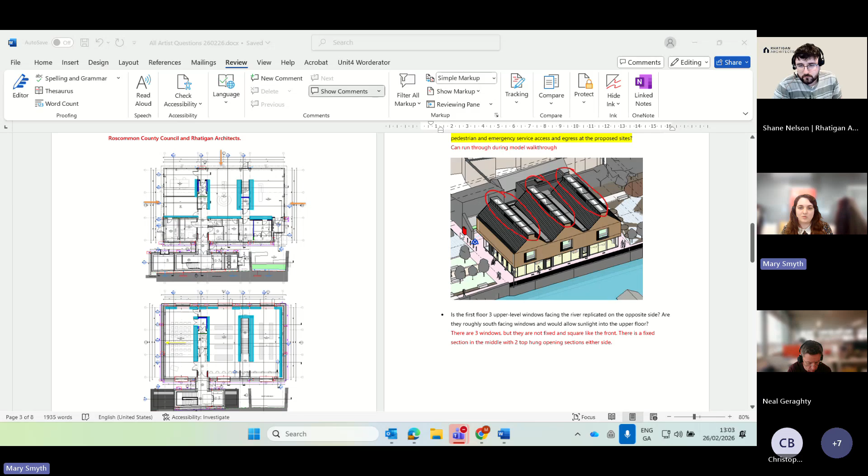So if there's any pedestrian emergency service access and egress at the proposed site, and we're also looking to get a better idea of the entrance way and the interior, and maybe some dimensions about walls and ceiling heights.

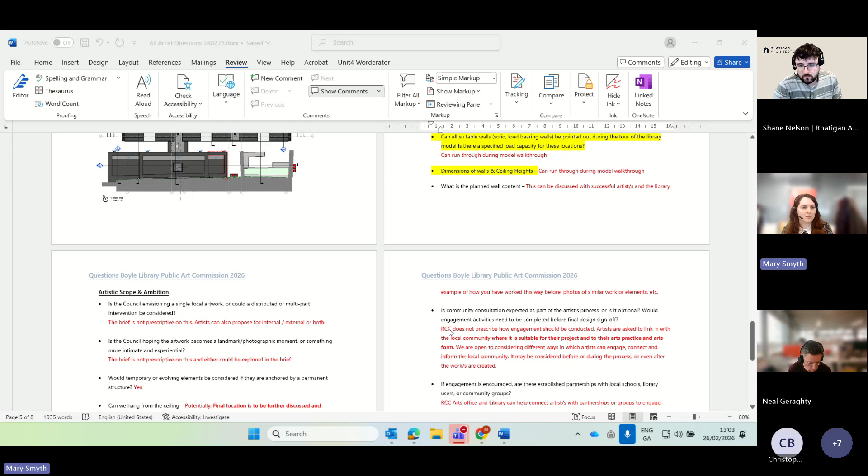And there were ones about, can we hang from the ceiling? We've said potentially, but that kind of final location is to be further discussed. So if that's all right with you, Shane, then those kind of bits can be highlighted for people.

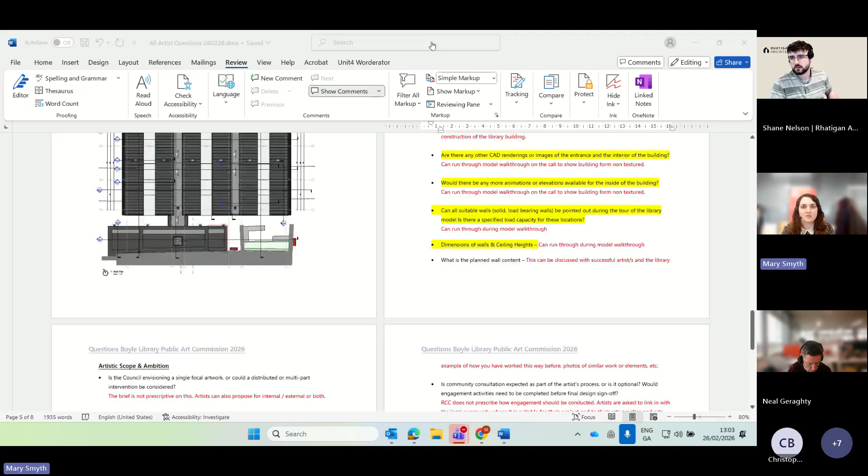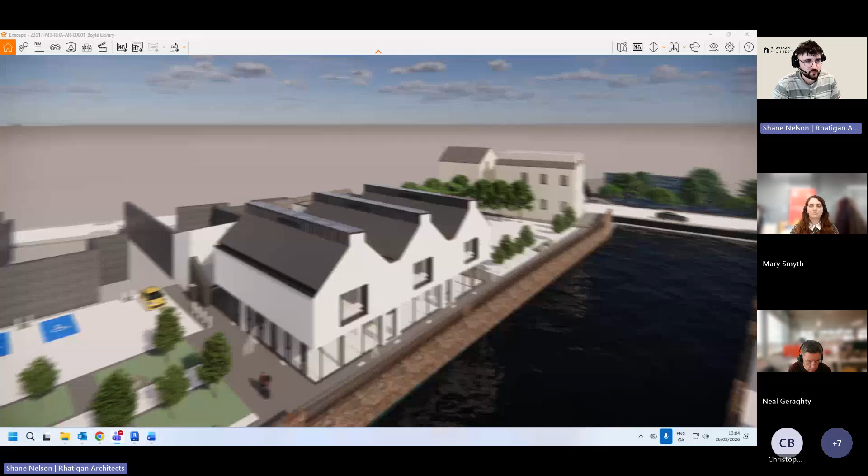Yeah, that's fine. So look, I'll do a run through the model here now, just to be aware it won't give you a sense of materiality because there's no textures applied to anything. So it'll just give you a sense of the form of the building itself.

So we have our three main A-frame pitch roofs. On the roof we have our roof lights from front to back on all three bays, so that sheds light into our three main open plan areas on the top floor. And then on the ground floor, we have our wrapped around curtain wall, and that wraps around the three main bays on the ground floor as well.

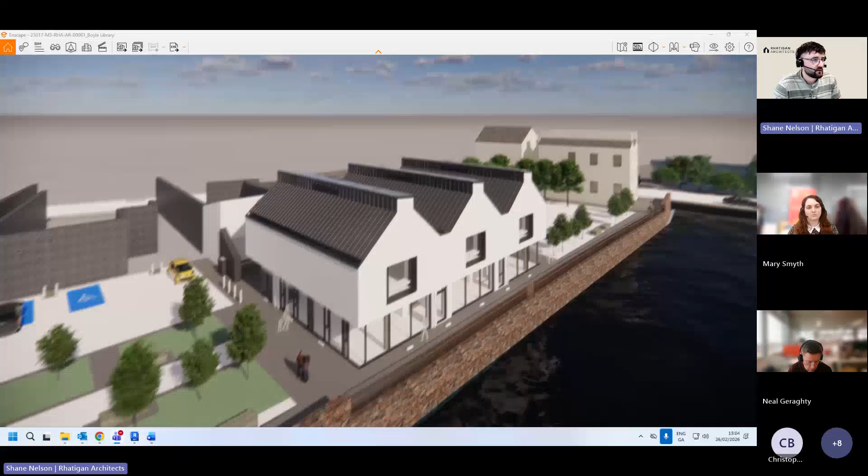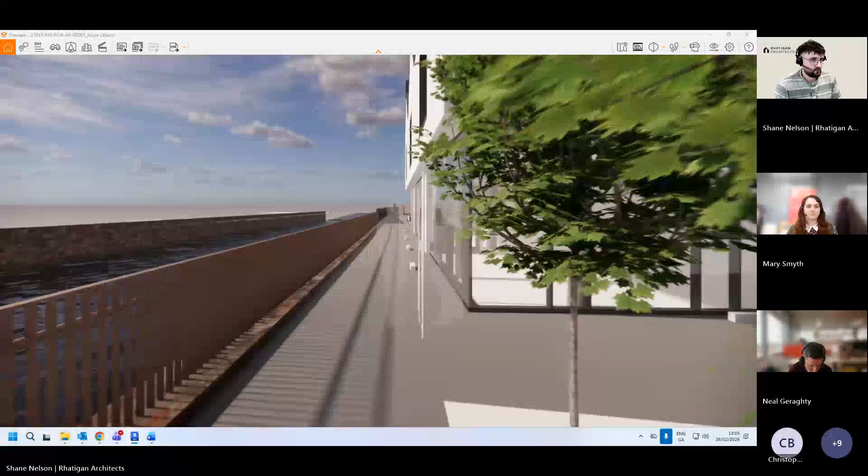So I'll just do a walkthrough if it lets me, one second. It's a bit clunky, this thing. So I'll just move around here.

So we have our courtyard area here to the left, and as we move into the entrance here, we wrap around and we have a sensory garden in this area here, and our main entrance is to the rear here.

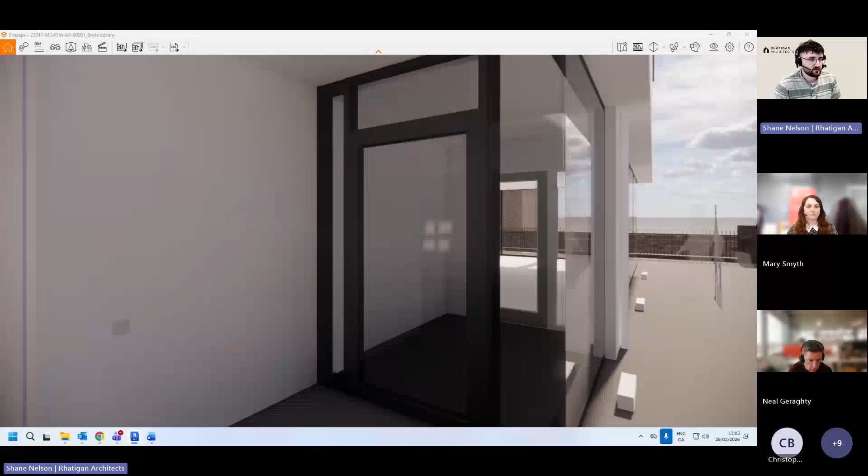So as we move in, we have our leisure reading area and main reception desk. This is our first bay, and then as we move through to the front here, we can move into our children's library area.

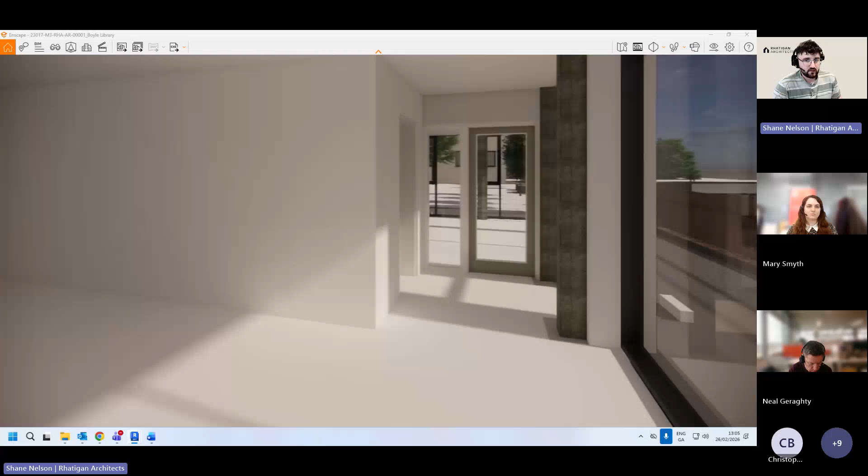So there'll be like a central desk in here for a seating area for sitting and all that sort of thing, and we have these two blocked areas here.

Now, there's no textures applied now because they were drawn in 2D, but our main bookshelves will be either side of the bay on all bays.

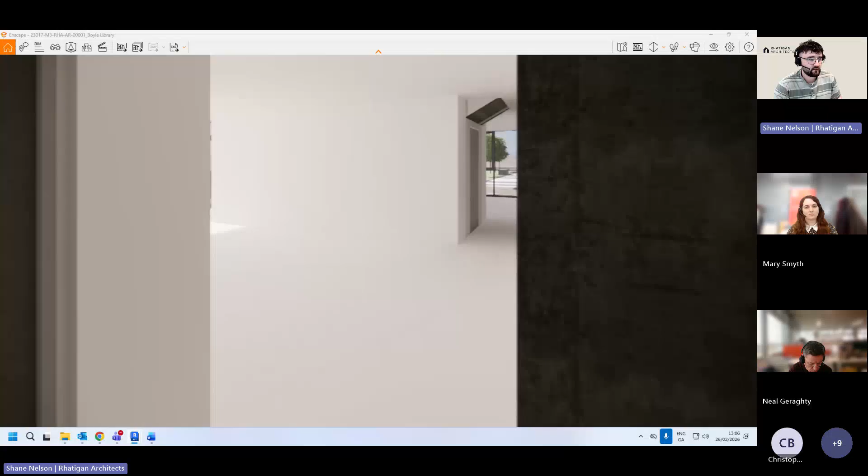So when we move into this area, we have a meeting room in here. We move back here, we have a staff room in here, and to the rear then we just have a vertical circulation area with light slices in each side, and we have our lift to the rear and a kind of back of house staircase then.

So I just move back to the front reception area.

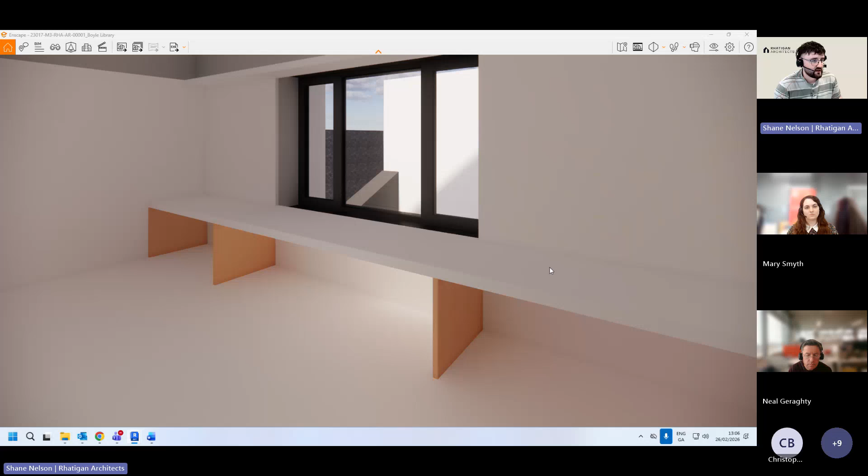So we have a main stair to the front that brings you up to the three main bays on the second floor. We have a tea station here, and desks and benches to the front and to the back.

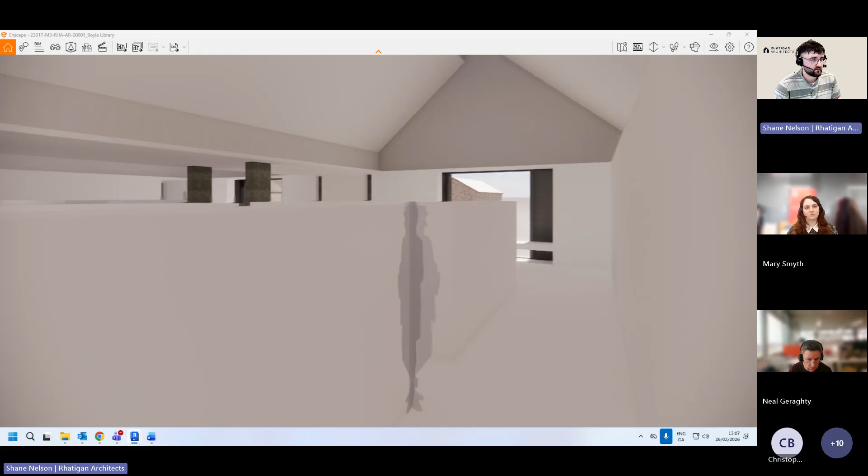If I pull back here, it gives you a sense of how the roof lights run front to back, throwing light down into this area. To the sides, these will all be bespoke joinery pieces for shelving and bookcases. In the center we do as well, but the textures don't really show it, though it gives a sense of what we're looking to achieve.

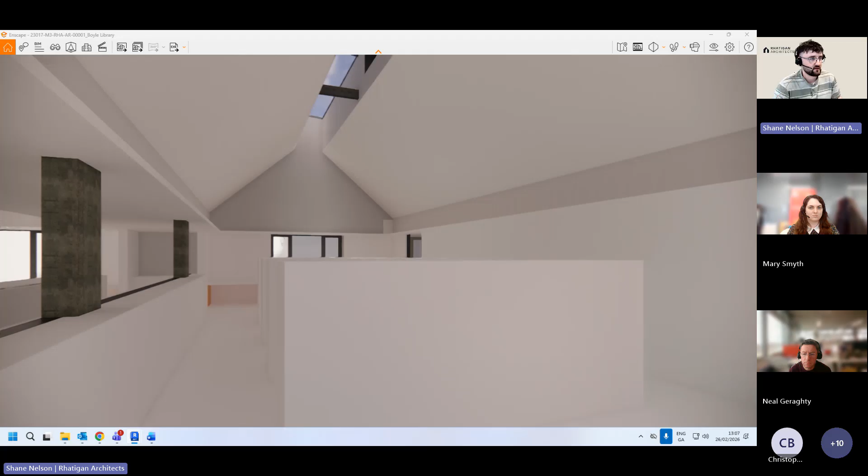So this is the first bay, and this is the teenage library area. If I move over, this brings us into the adult lending area, and we have the same concept where we have bookshelves on the sides built into the wall, and four main bookshelves in the middle as well, throwing in the light the same way.

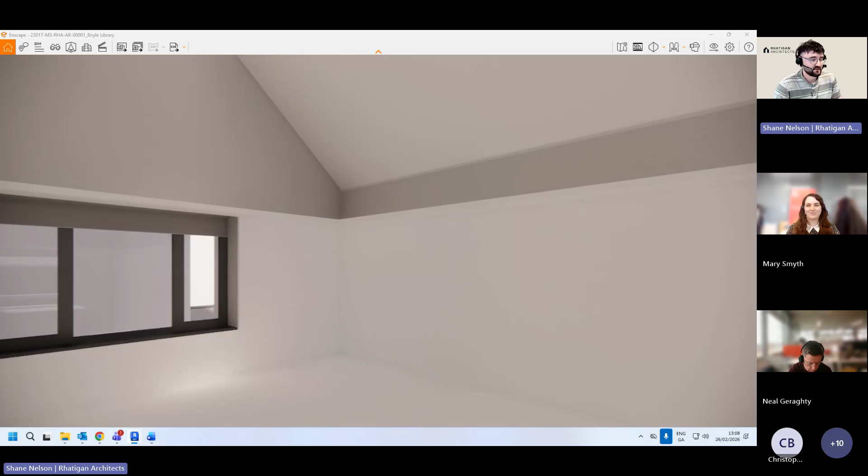And then our third bay is the event space and meeting area. This is the main area where we don't have shelving to the front and back, so it's more of a blank canvas where we could potentially do something artistic, some canvassing on this wall here. I've included that in the document as a potential area. And on this side, we do have some bookshelving on this end, so that should give a sense of what we're looking to achieve.

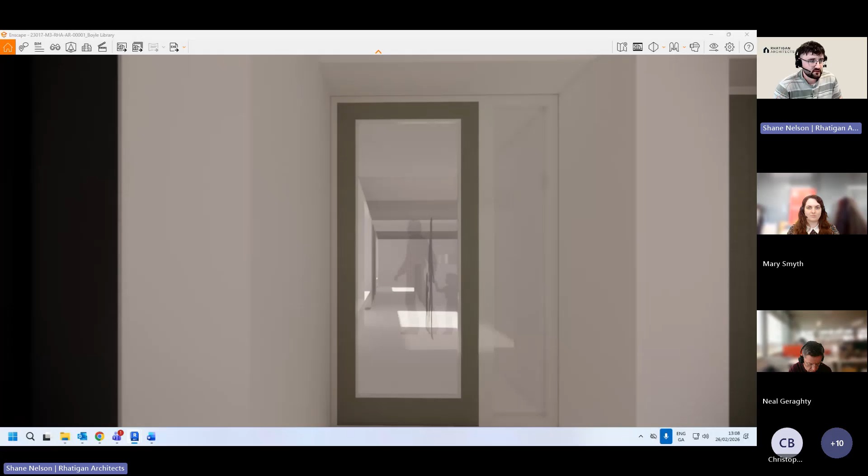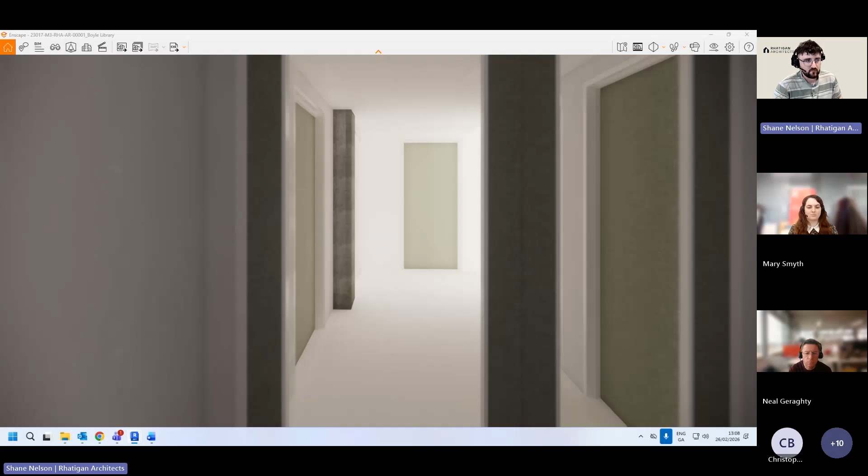I suppose I might just go back and show how it connects to the back of house staircase. So we have an exit here that gives a view each side, and this is the back of house staircase, as I showed at the start with the lift and all that.

So I suppose that gives a general sense. Is there anything else you want to run through? Maybe just a little look at the outdoors, at that front area, if that's all right.

There was a question about preferred location. We don't have a preferred location at the moment. We haven't decided where it might be best suitable, and we're open to it being external, internal, or both. So it's quite broad. We'll give a look at the outdoor area, and if there's anywhere in particular you want a further look at, just put it in the chat and we might have another glance.

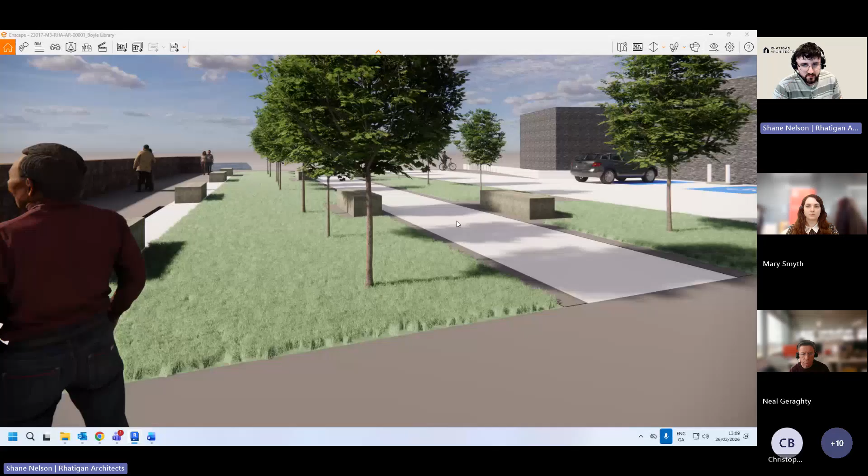To the rear, this isn't fully modeled yet, we've had it drawn up more so. In the middle we have a gravel walkway running front to back, connecting to paving at the far end. The paving wraps around each end, with green areas each side and concrete benches running along the center.

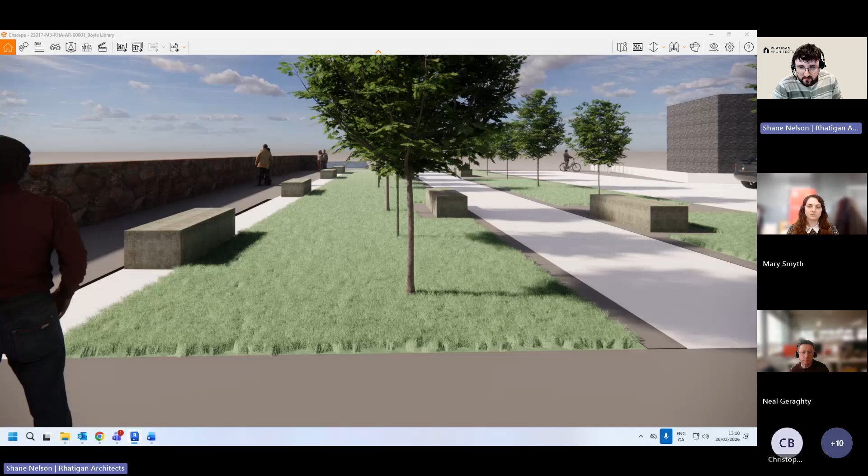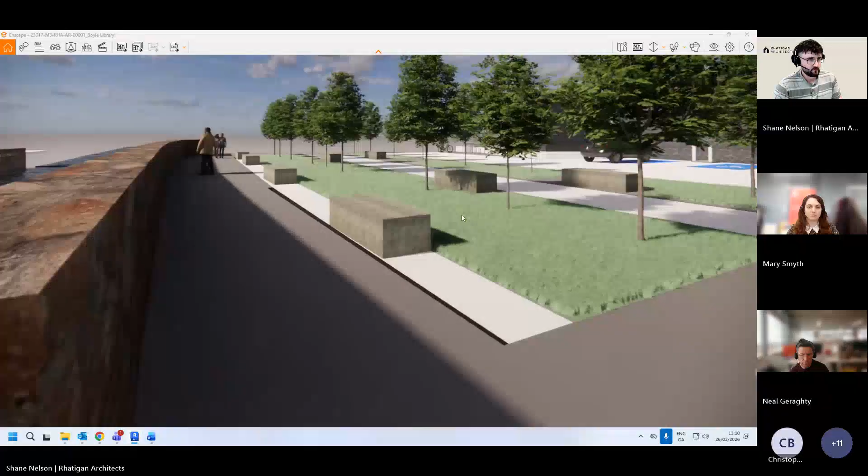And then we have our parking towards the rear here. I'll do a fly up, which might give a clearer idea, a bit more of a general sense of what we're looking to achieve here. Just to give people an idea, we're seeing the bridge over there where the car is.

That's where you'd be walking in from town. So that gives a general sense. The background and context isn't modeled now, so it's kind of hard to visualize, but it gives a general sense in relation to the entrance on this corner here.

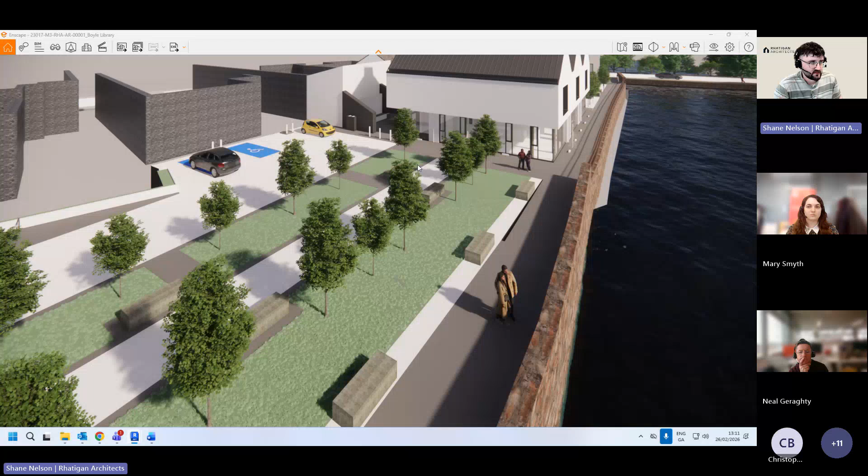Can you go around to the other side, Shane? Just where we have a courtyard as well. There may be an opportunity to develop something there that would encompass both buildings, the library and the existing Royal Hotel that was renovated.

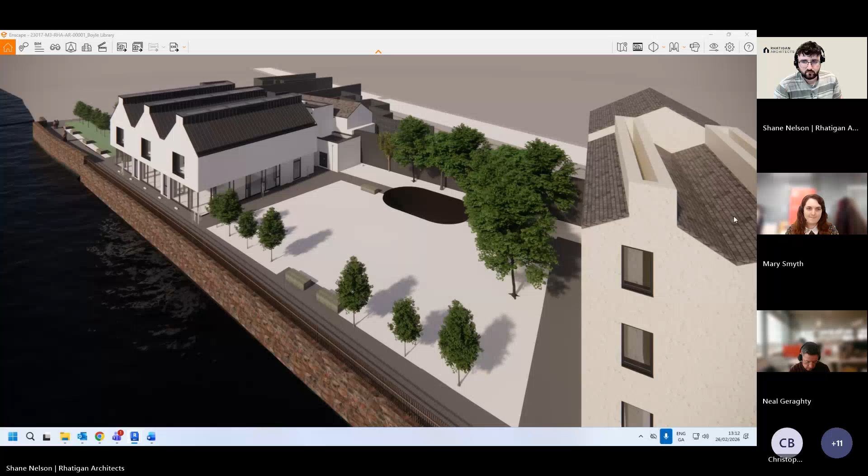This area here has an existing structure in that zone, just to give you a sense of where that is - it's a minor little bandstand, just a covered bandstand. If anyone wants a further look at somewhere on the external or internal part of the model, send a message in the chat. The Royal Hotel building is the one here to the right of your screen, and people can see from across the river over to this space as well.

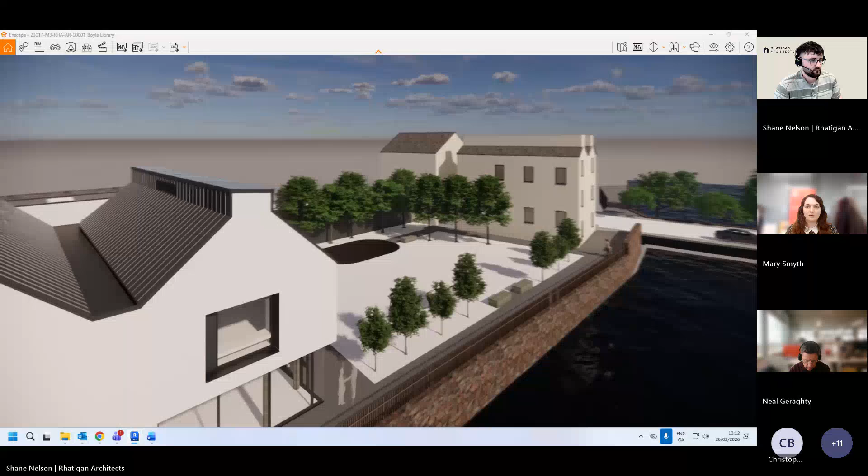I can't see now if there's anything that comes into the chat there. So you might give me a nudge if there's anything.

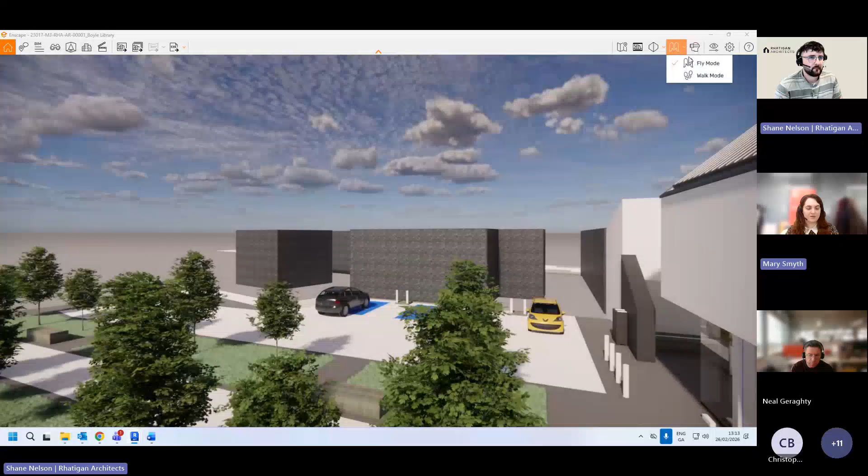It says here, can you zoom to what it would be like to enter the library? There's a few people that just joined in there and might have missed walking into the entrance. So this is the front area.

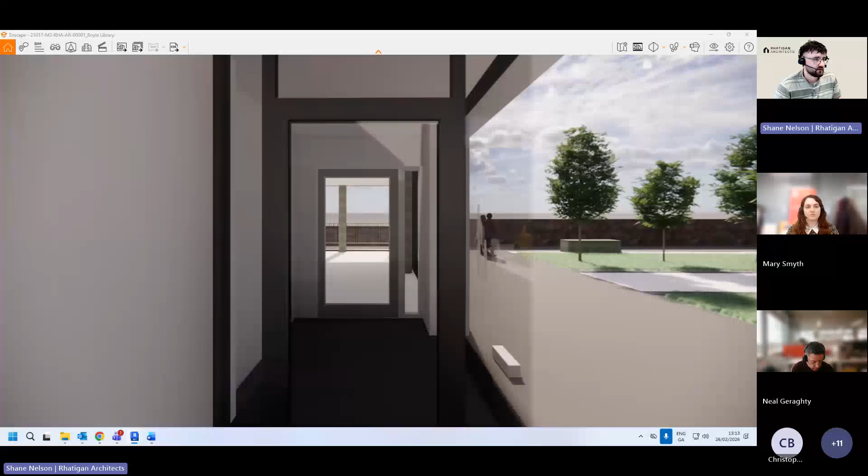The front area with the outdoor space and car parking, and then we're coming into the entrance here. So as you pass into the library, we've a sensory garden area that'll be in this zone, in between two existing buttresses that are already on site. And then as we move through, this will be the main door entrance.

As you move in, then you move into the main children's area - the leisure reading and reception desk area.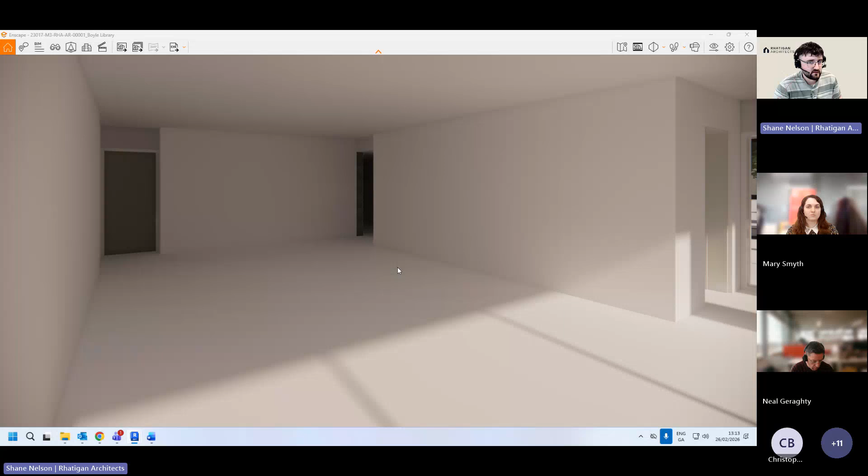So when you move through here, then you have your three main bays. Your children's library will be in this zone, and there'll be a seating area in here. We've our staff room and meeting room on each side here.

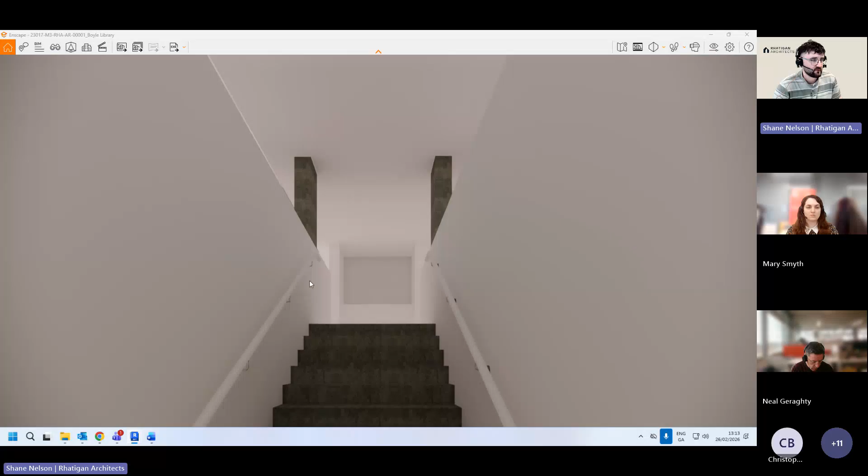And then we have our main circulation staircase as we move up, which will have lighting underneath each of the handrails. As we move up, you can see the main bay where our roof lights throw in the light from above, with the pitch to ceiling into the room here.

So we just got a question there. What are the ceiling heights on the ground floor and the first floor? I'll tell you here, give me 2 seconds.

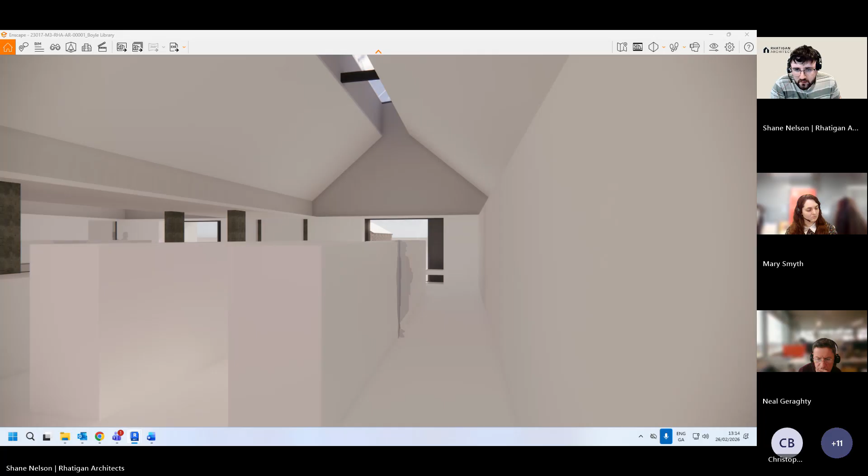On the ground floor, we're getting 2.7 meters everywhere consistently, and then on the upper floor, then we achieve...

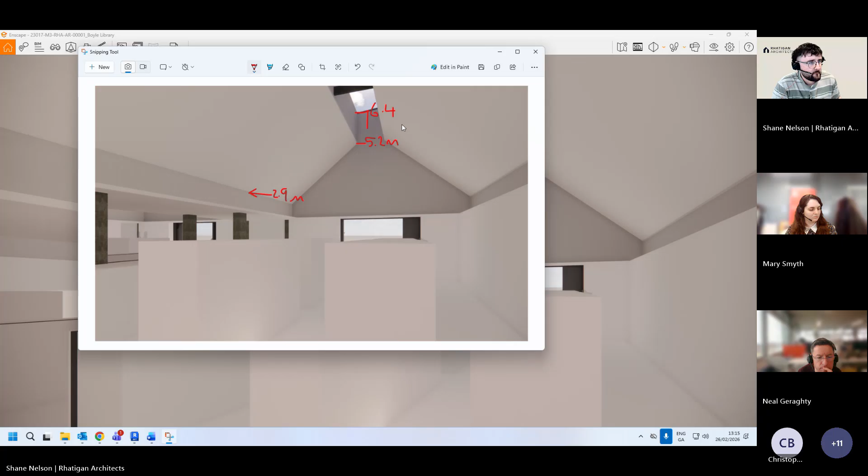So from the ground on the first floor to this point here, we're getting 2.9. And then up to this point here, it is 6.4. If you want the height here, it is 5.2 meters. So that gives you a sense.

And on the ground floor, it's 2.7 consistently everywhere. And each of the three bays all match, so the pitched roof is the same on each - it's the same heights achieved across the board.

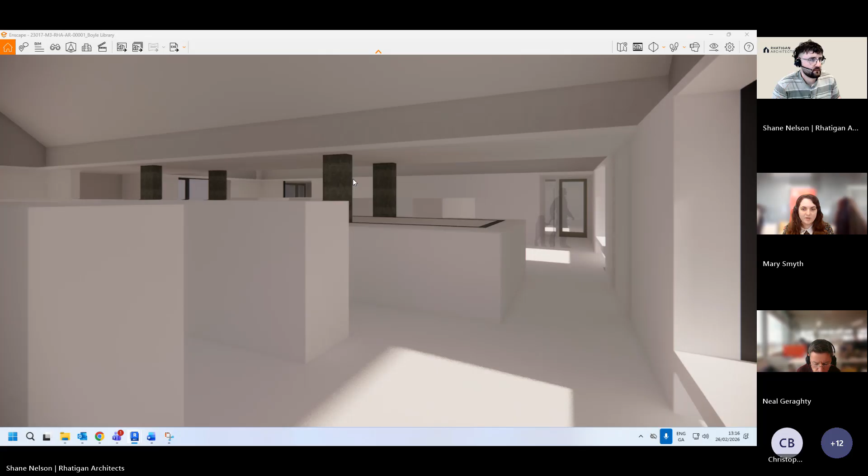Was there anything else there, Mary, that came through there? I think you're on mute, I think.

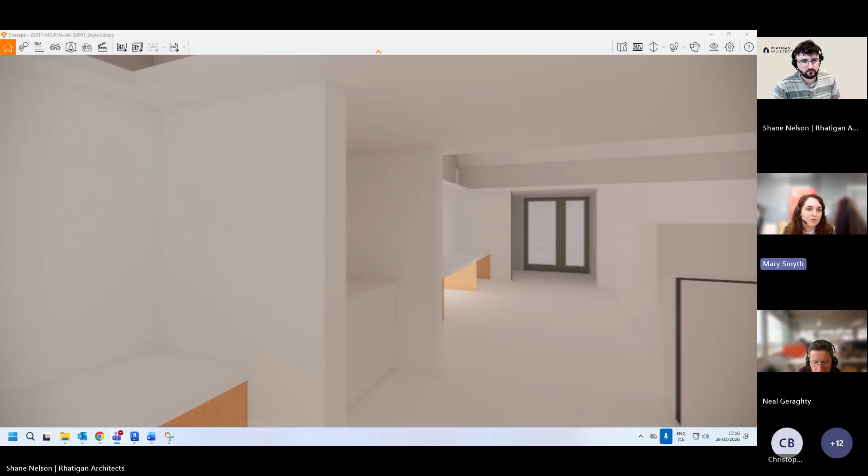But just in particular to anything that's here, I know some people had mentioned about where there were areas that were not possible to have work installed due to services, fire routes, access requirements. So that's included in the document.

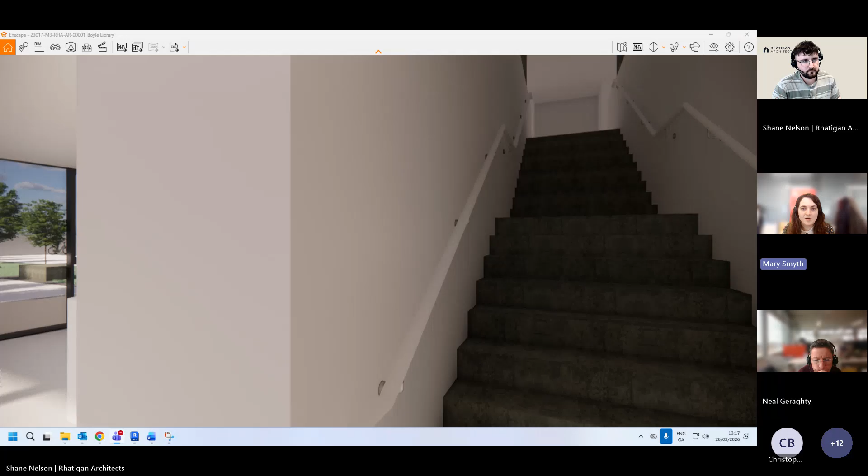Shane has highlighted a few areas there, and key surface areas that might influence fixing or furnishing of work on the walls. So to answer that, there's external cladding, and it's African hardwood, and that'll be circulated as well. And the interior walls are veneered oak boards and painted plasterboard.

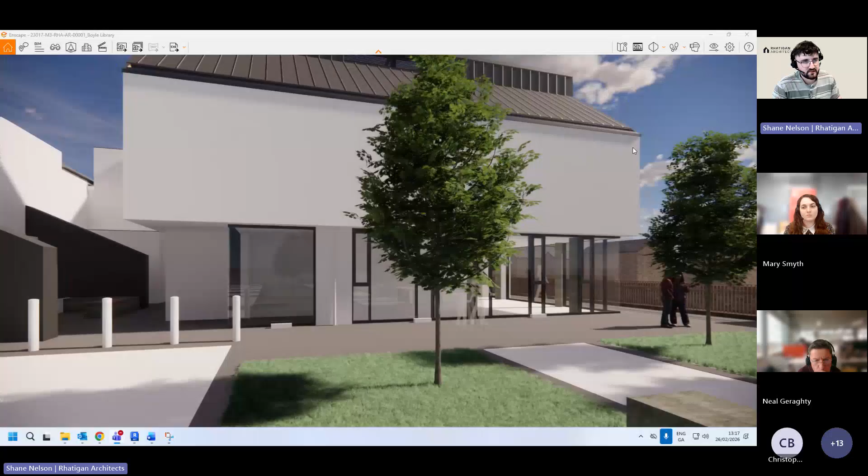So just a sense on the outside - on the upper floor here, we have our timber cladding boards that run horizontally all throughout the first floor. That runs the whole way around the building. And then on the ground floor, we have our front of house floor to ceiling height glazing.

And then towards the rear, we have a black brick, like for example here, and towards the back, we have a black brick that runs the whole way around. And this back of house vertical circulation structure as well, that's all black brick as well.

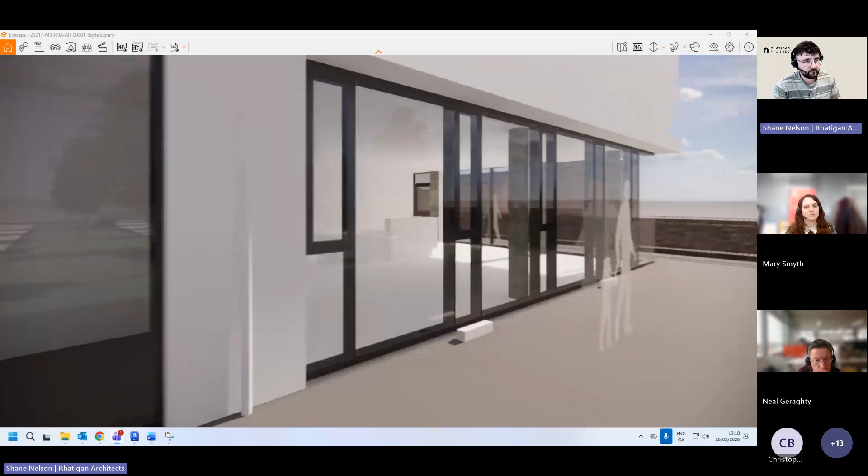So if that gives a sense of the finishes. Now, if any further clarification is needed on any of the finishes, we can go back to that with Mary's document there, so we can confirm any of that if needs be.

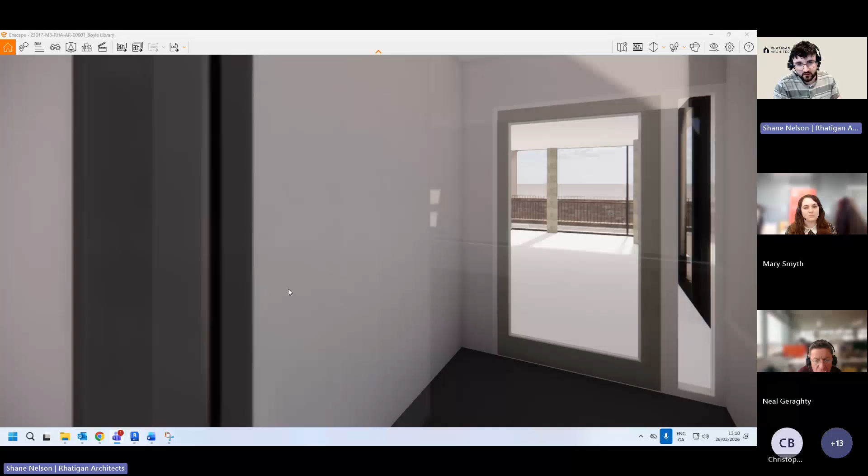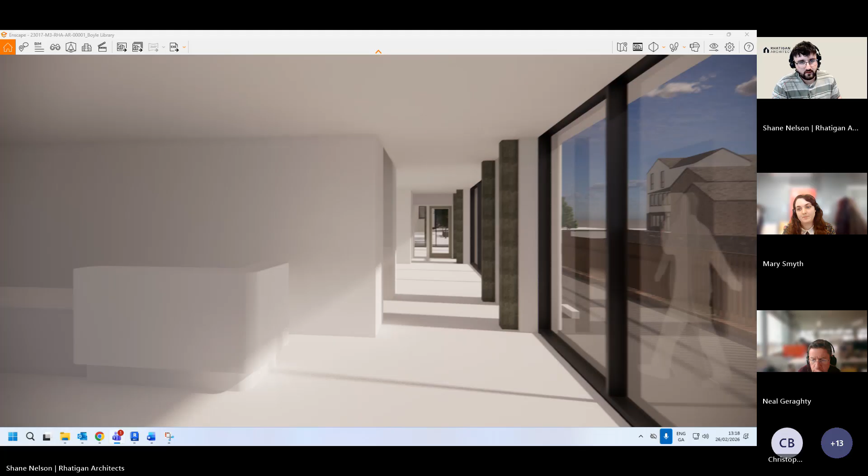There was a question about whether there are sprinkler systems in all ceilings, and at what building stage the artist could talk to the builders about things like electrical wiring. There is potential for power to be added to a piece if needed, but it needs to be contracted and coordinated with everyone involved. Artists will chat with us at the council and with the architect team. There is possibility for integrated power, but it needs to be coordinated during design or construction stages. As for sprinklers, no, there aren't any.

Someone asked if you could zoom out in the main entrance again, perhaps about 10 meters back. And is there any restriction on suspended sculptures? We haven't been prescriptive on what's allowed and what isn't. There will be a conversation with whoever is selected about working within the space and what's appropriate, but if something's hanging from the ceiling, we're open to what someone might suggest.

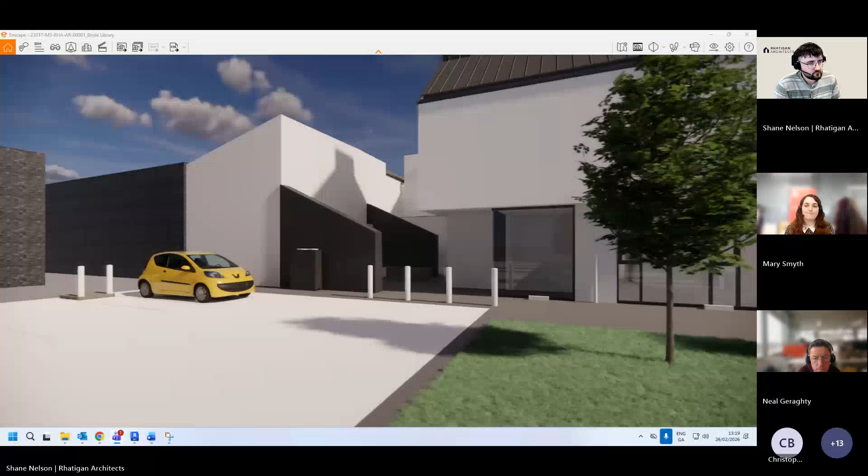Just a little bit further back. There was also a question about the length of the long wall that could potentially be used in the meeting room. I'll get that for you now, two seconds.

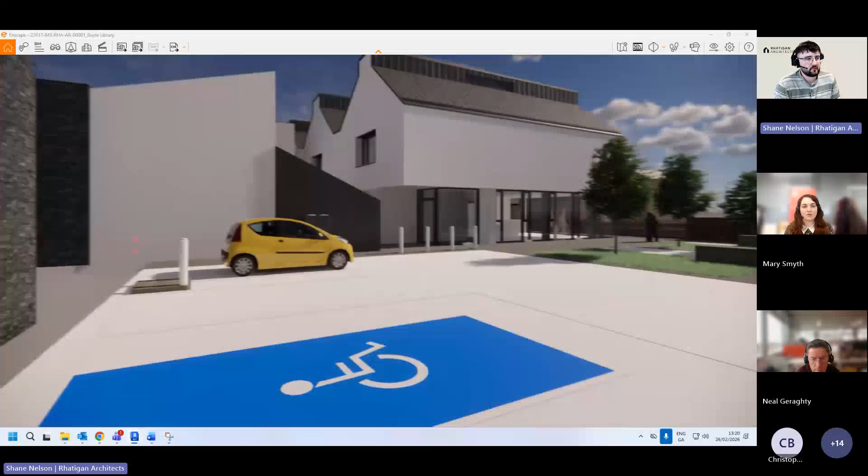I think someone was just adding into the call, so we're having a look externally. This meeting is being recorded, so I can send it on in case you've missed things earlier. I'll get the length of that wall now, give me two seconds. And someone also asked about the width of the meeting room, just for an idea.

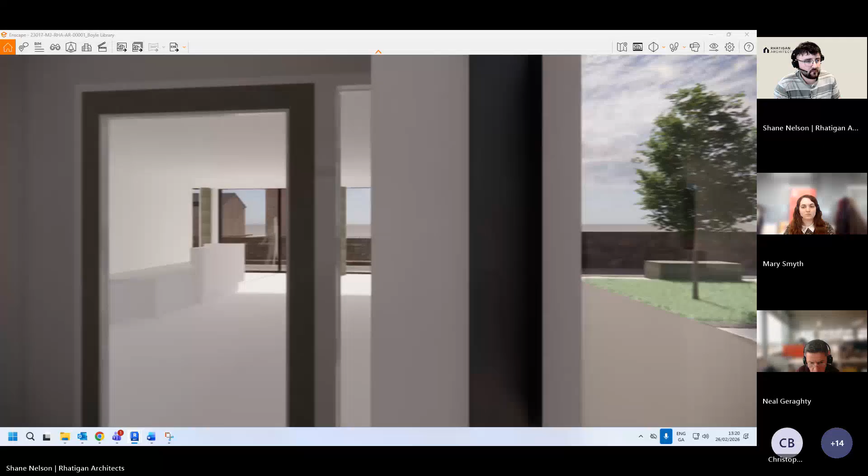The wall in the event space upstairs is about 13 meters long. On the ground floor, the meeting room - if I go back to it - from this wall to this wall is 5 meters, and from this corner to the glazing it's about 4 meters. So hopefully that clarifies it.

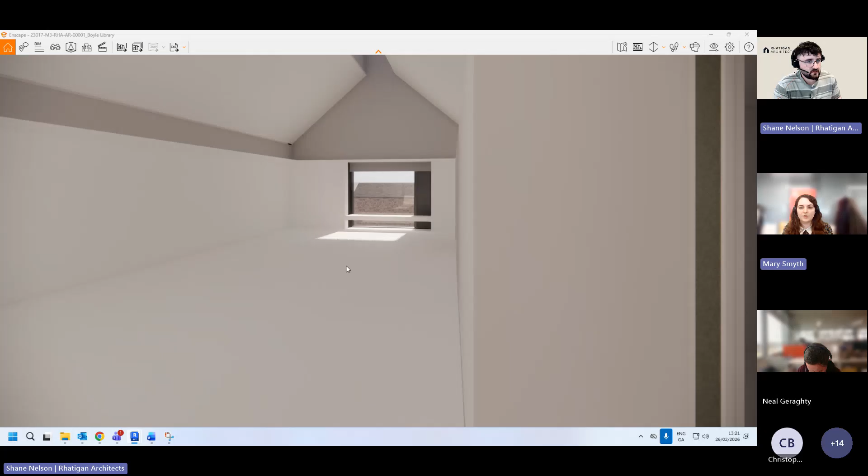Someone was asking about the event space upstairs, particularly the length of that. I'll go to it now. From this corner to this corner is 13 meters, and from this corner to this corner is about 5 meters in width. So that gives a sense. Is that okay, Angela? Yeah, she's happy with that.

For whoever added in at the end, there is going to be a document circulated with more information, questions and answers. If there's any last viewpoints people want to see here, just flag it with us now.

Just do a kind of raised shot of the entrance - I think someone was looking for it.

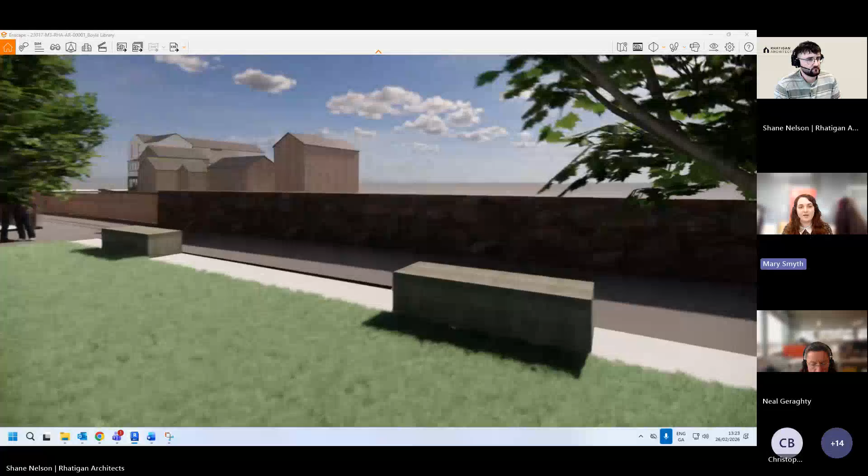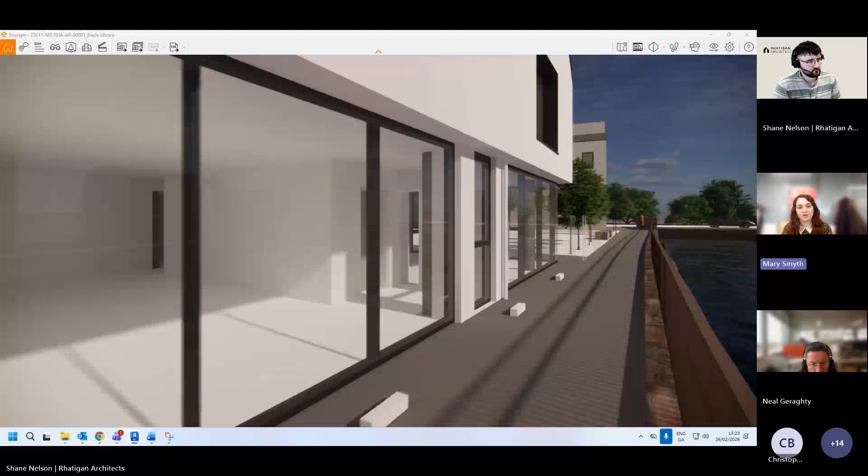For the people that are added in, we haven't said whether this is an internal piece or an external piece - we're happy for either or both. There's the option of having it outdoors at the front where the entrance is, or in the courtyard behind the library which connects to Enriga, or within the library space itself. So we're pretty open to that, and there will be more conversations with the artists, the council and the architects on working that into the space.

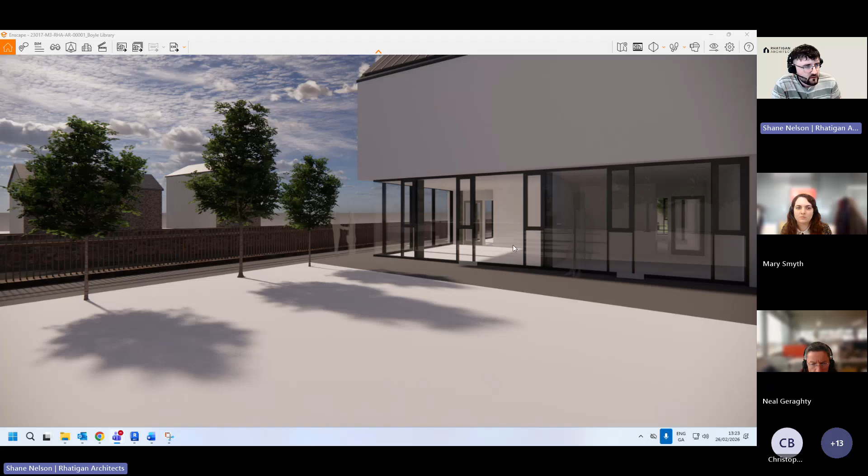We're getting a question here - can you drop down to the path central? I assume that must be at the front area. And can artwork be considered for the grey wall areas on the upper floor? So, can you drop down to path central - that would be at the front, yeah.

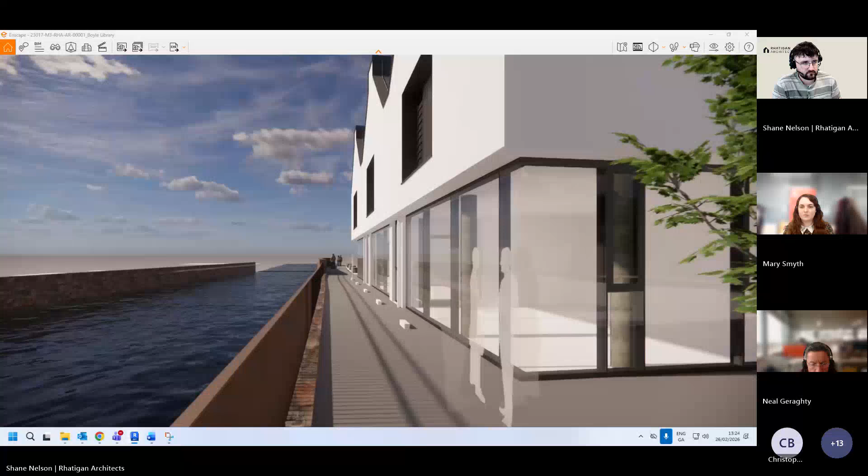As in the front of the building or to the reception, yeah Cathal? I think so. As if walking in the path, yeah.

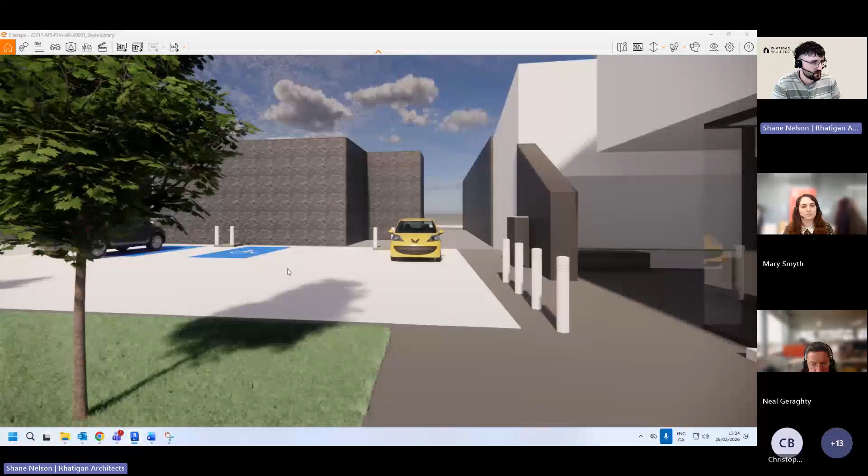There's a question here - what's the exterior wall behind the yellow car, and is that a surface suitable for hanging artwork? I wouldn't say so at the minute - this is kind of roughly texturized here, so I don't think it would work for the moment. That's an existing building, isn't it? Yeah, it is - it's a neighbouring building on the corner.

Not that wall, Elaine - which wall are you thinking? The one here to the right of it, is it? Of the yellow car?

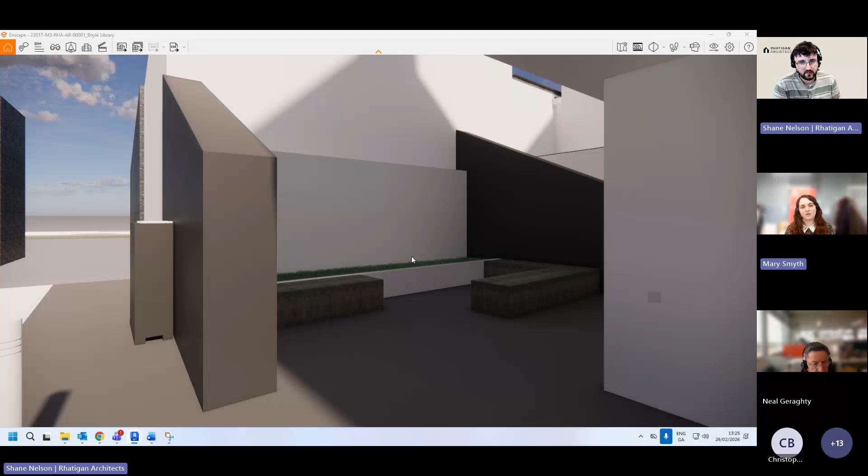Yes, where your mouse is hovering, Shane, potentially that's an existing buttress wall that's been there. And again, Elaine, there's a sensory kind of area within there as well. Those buttress walls are stone, natural stone, and they would be repointed. But there's also a unit to the left of it, an air conditioning unit.

Would that be right to say? Yeah, Shane, there are other pieces of equipment in close proximity to it. So Elaine, I think the white wall you're mentioning is a piece being built into it - it's a retaining wall that's needed there. The finish hasn't been decided on yet, what it's going to be, so potentially there could be scope there, Elaine.

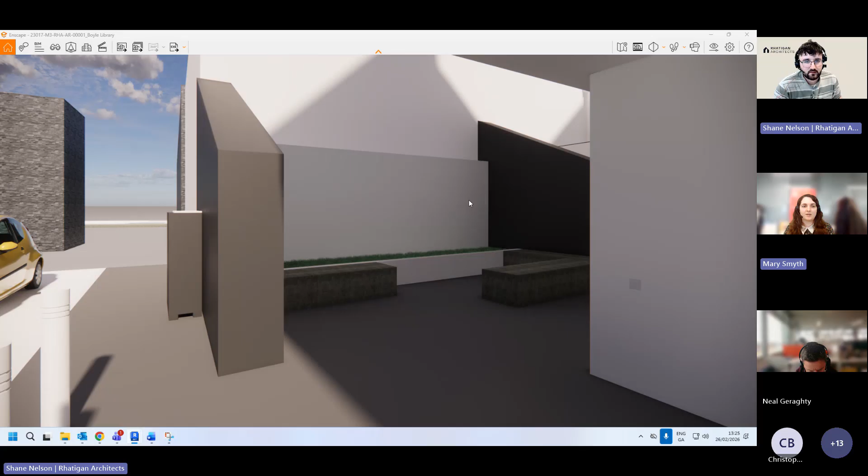That will just be a sensory space, so you have to be mindful of that. And there was one question: can the artwork be considered for the 3 grey wall areas on the upper floor?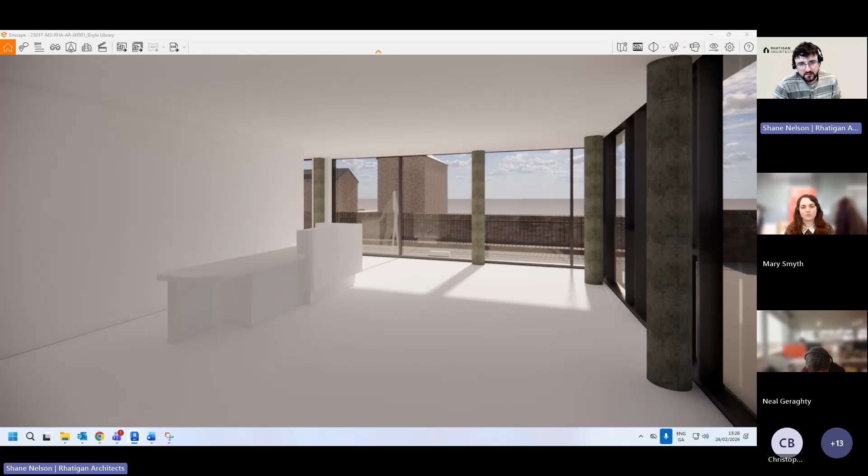I suppose that'll be clarified. I sent that markup to Mary showing what areas have bookshelves and joinery, and what are blank walls, so that'll be clarified in that, I'd say. And there's not surface textures on every single wall in here either - it's kind of giving you an idea of the space and the lighting.

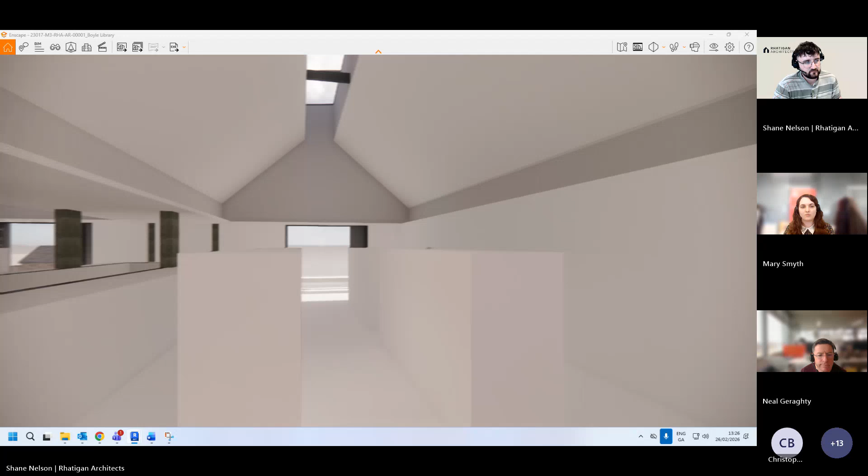Could we have a measurement of the sensory wall area? We can get that for you, two seconds.

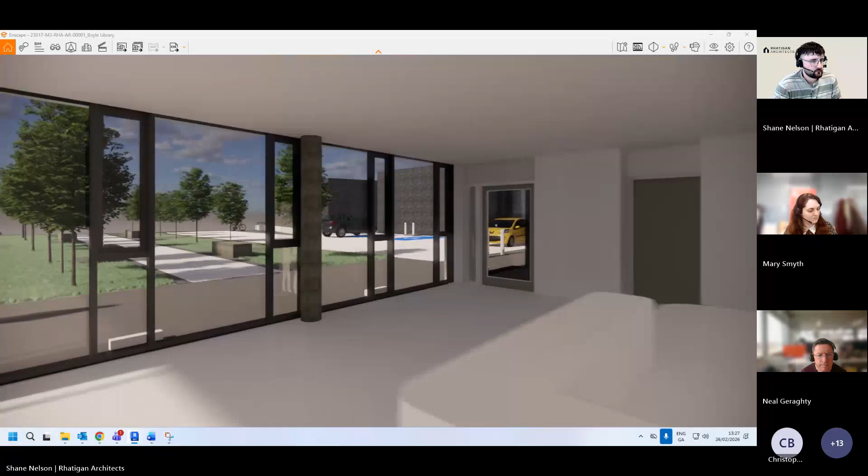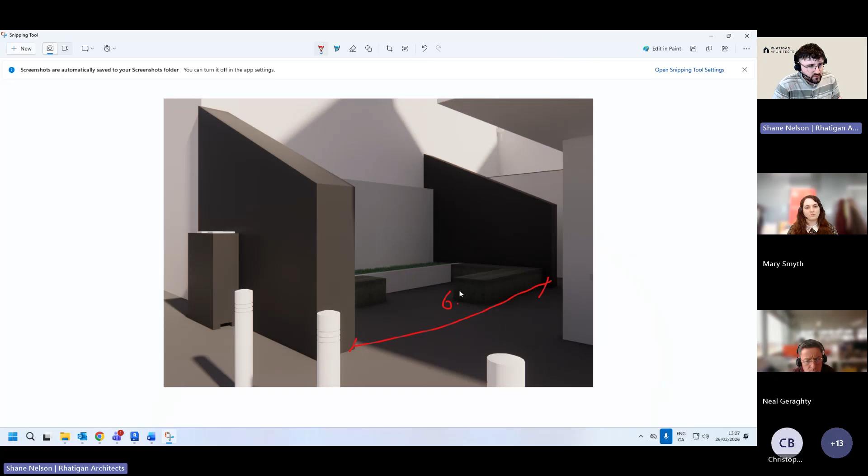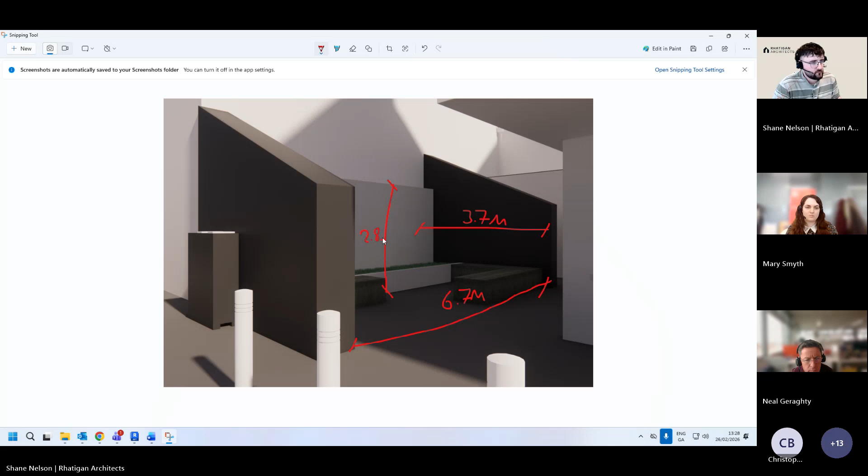Just sketching it again, probably easier. So from this corner to the far corner is 6.7 meters, and then the depth is 3.7 meters as well. I'll just get the height of it here too - that's about 2.8 meters high. So I think that should clarify that.

So we have a question about CAD drawings available for the library. Yeah, we should be able to circulate some. I'll add that in with the document as well.

And there is the planter in front of the area. That's within the sensory garden, that kind of planted area, and it's like a seating area to the front of it as well.

And is the plant already planned? Would it go up to a height, or would that impact any visual that might be behind it?

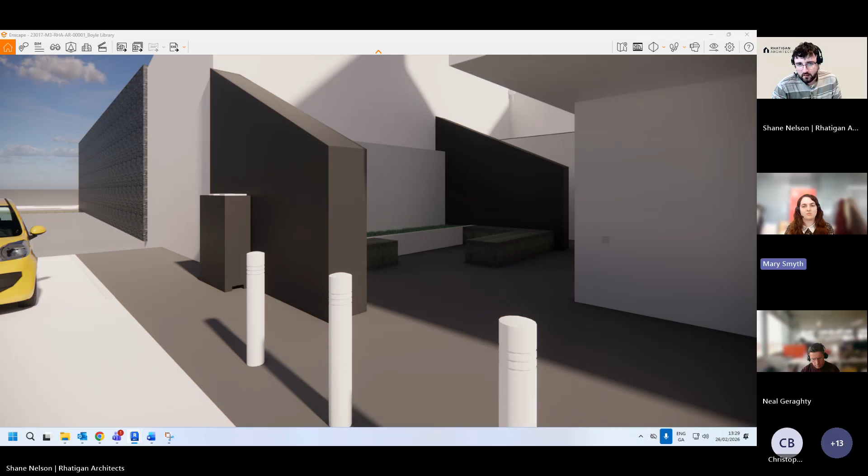Basically at the minute, what's there is a corner concrete planter, and this is another concrete planter or concrete seating planter as well, and this wall runs along here. It's a concrete wall, and then whatever the planting is in that zone. So the finish for this wall to the rear, the 2.8 meter high wall, hasn't been decided yet - that's still to be determined.

Great guys, we're just coming up to half one now. So is there any last query on the visuals? I will be in touch - there were a good few questions about different things, so hopefully that'll clarify it, but you can follow up with me afterwards.

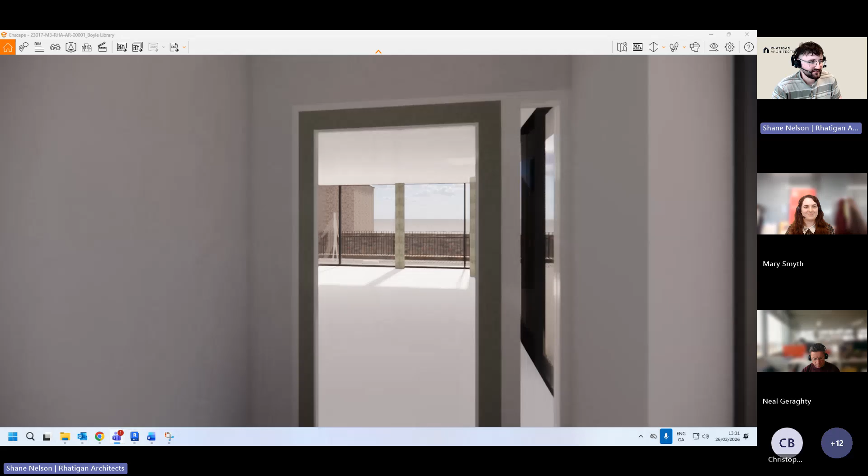We just have a slow walkthrough approaching and exiting which will be great as a final note. Yeah, fine. This software I'm using is quite clunky, so I'm getting to grips with it as well.

What are the 3 high ceiling rooms used for? That is the upper library space - there'll be bookshelves along all of the walls up there, and the white blocks are also shelving. And the event space is upstairs as well.

Was that what you're looking for, Cathal? Does that help? Yeah, he says it's very helpful. Thanks a lot, very good, great.